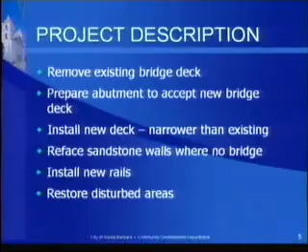The project, as indicated, would remove and replace the existing bridge deck over Mission Creek. It would also include preparing the abutment to accept the new bridge deck. It must be understood that the new bridge deck would be a little narrower than the existing one. The sandstone walls on the banks of Mission Creek at that location would be refaced, and new handrails would be installed. Finally, when the project is complete, the area will be restored to its existing appearance.

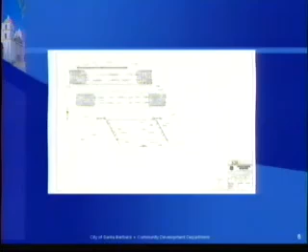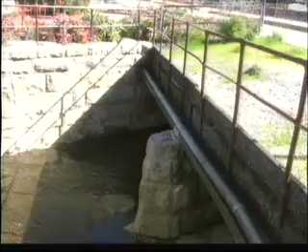Here's a picture of the bridge deck itself, this time from the northeast. Here's one directly from the north, and again from the north. Here's another photograph that shows the central support for the bridge. This is the area that would not be replaced; it would be open creek after that project. And I should have removed that one. Here's... whoops, no, I shouldn't have.

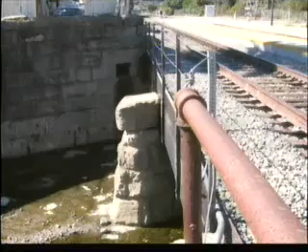This is a picture of the north side of the bridge from the west end overlooking the railing. And this photograph shows the actual bridge deck itself. Here's the railing on the north side, and this area over here is the area of the bridge deck.

Staff recommends that the Planning Commission make the findings in the staff report and approve the project subject to the conditions of approval attached to the staff report. That concludes my presentation. We have Pat Kelly and Steve Foley staff available to answer questions, and Jeff Teague of HDR Engineering and Lindy Althouse, who are the agent, to answer any technical questions you may have about the project. I'm also available to answer questions.

Thank you. Are there any questions for staff at this time? Mr. Bartlett? Thank you, Mr. Chair. When we were at our site visit on Tuesday, it was explained that the center stone pier at the midspan of the bridge was to get a new sandstone cap, but I'm not seeing that on the plans. These are hard to read because they're so small scale. Maybe, is that correct, or were we just misled at the site visit, perhaps?

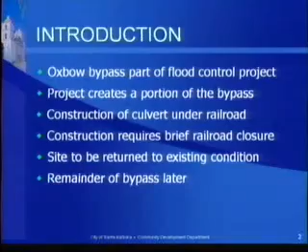Chair Myers, this project would install a culvert beneath the railroad line at the western end of the railroad depot. This is a portion of the Lower Mission Creek Flood Control Project, Oxbow bypass, that would allow high flows in the event of larger storms to bypass a portion of Lower Mission Creek and provide additional flood control capacity. The project creates only a portion of this bypass, specifically the construction of the culvert underneath the railroad itself.

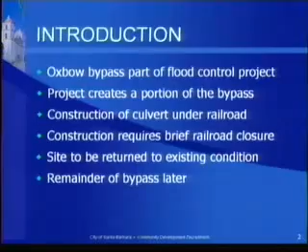Construction requires a brief railroad closure, and the site is to be returned to its existing condition when the project is completed. The remainder of the bypass will be constructed at a later date. This project is coordinated with the earlier project I mentioned, and the applicant's intent is to have the 24-hour closure occur at the same time on both projects.

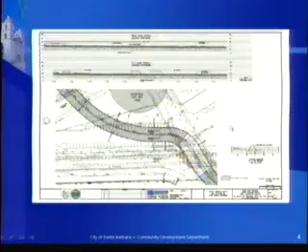The project would involve removing the existing asphalt, concrete, rails, lights, and any furniture located on the railroad station at that location. They would excavate approximately 3,525 cubic yards and stockpile some of it, exporting approximately 1,600 cubic yards.

They would install the concrete culvert in a series of sections that would be attached to one another. The dimensions of the outside of the culvert are 43 feet wide, 102 feet long, and 9 feet deep.

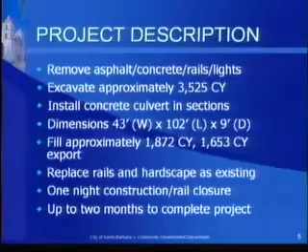Approximately 1,870 cubic yards of fill would be placed back around the excavation site. The rails would then be replaced, and existing hardscape would be replaced as is existing. Again, this project includes 1 night of construction and rail closure, and it's expected that the entire project would last less than 2 months. Here's a plan view showing the various culvert sections.

The culvert sections are roughly 2 feet wide this way and roughly 40 feet long this way. Here is a section view of the culvert. There would be 2 of these placed one next to the other, so they'd make almost like a figure 8 shape. This is all reinforced precast concrete that would be brought to the site on the back of a railroad car.

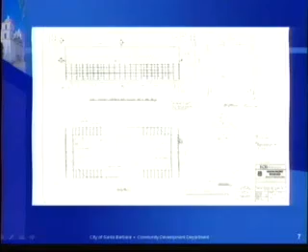Staff recommends that the Planning Commission make the findings in the staff report and approve the project as conditioned. That concludes my presentation. We have Pat Kelly and Steve Foley here to answer any questions you may have. We also have a representative from County Flood Control available for questions.

Thank you. Are there any questions for staff? Ms. Larson?

Thank you, Mr. Chair. Could you please describe any protection measures proposed for the Moreton Bay fig tree, or if they're necessary with this excavation? For this component of the project, we're quite a distance from the Moreton Bay fig, so no precautions are proposed. But when they do the extension of the Oxbow to the north to the 101 freeway, they are proposing to move that segment of the alignment a little closer to the Bay fig. There is an arborist report on that subject that indicates if they properly mulch and fertilize the tree, using the same mitigation as originally proposed in the Lower Mission Creek Flood Control Project, there should be no impacts on the Moreton Bay fig.